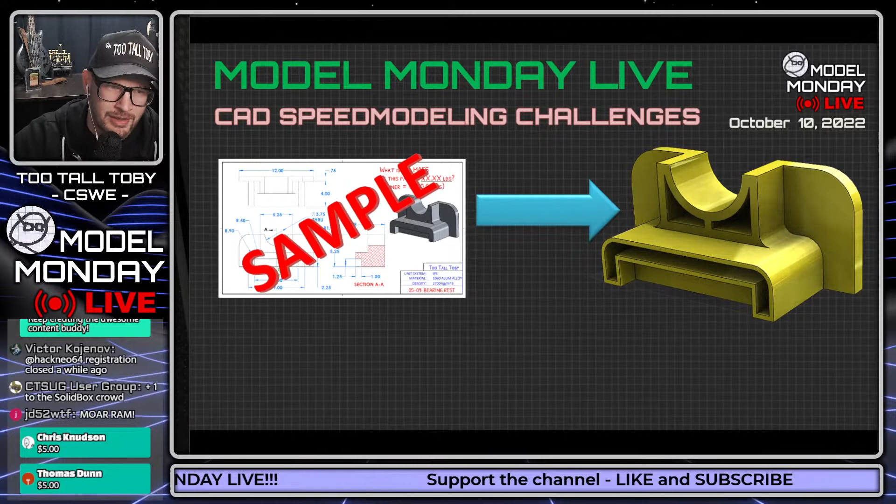So with that, let's get into the live speed modeling challenges today. Here's how this works. I'm going to show you guys a 2D print, and I'm going to challenge you to turn that into a 3D model. You're going to calculate the mass for that 3D model, and you're going to enter that mass into the YouTube chat. You can use any CAD system you want, as long as that CAD system will allow you to input density and output mass.

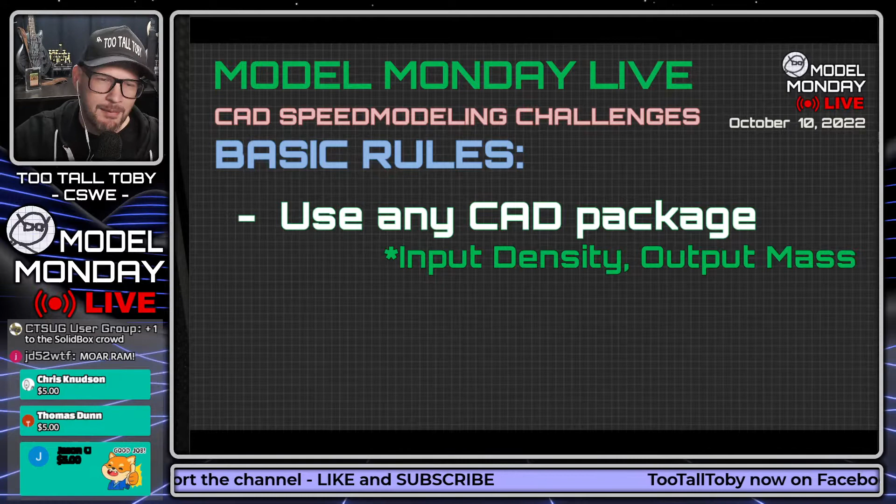So you can use any CAD system you want as long as you can input density and output mass. Let us know in the chat if you're using something other than SolidWorks. Would love to hear from some other non-SolidWorks users, and let us know if you're using SolidWorks as well. Let us know in the chat what CAD system you're using today for this 3D CAD modeling challenge.

What's up, Jed Hightower? Welcome. Make sure that when you answer this question in the chat, you use the specified precision, and the first person who gets the answer correct in the chat will be declared the winner. So I see some people saying SolidWorks. Airwick says he's using OnShape, corrected to OnShape. We allow corrections here. Victor using SolidWorks 2020. Steve, CTSUG, what's up Steve? Using SolidWorks 2021. Anti-Venom, SolidWorks 2020. My favorite build is SolidWorks 2020 SP5. Love it. Ali using SolidWorks 2022, good luck Ali. Thomas Dunn using SolidWorks 2020 as well. Betty Baker 2021. Garrett using 2022 SP4. Coded my own modeling package, only work from the command line in Linux. That is impressive.

JD52, the units that we use for these challenges are always either IPS or MMGS, so inch-pound-seconds, or MMGS, and the materials are always one of these three materials here. You've got density 7,800 kilograms per cubic meter in plain carbon steel, you've got 1060 aluminum, and ABS. These might be different densities depending on which CAD package you're using, so just take a moment and make sure that you have the correct density. This density will also be listed on the title block.

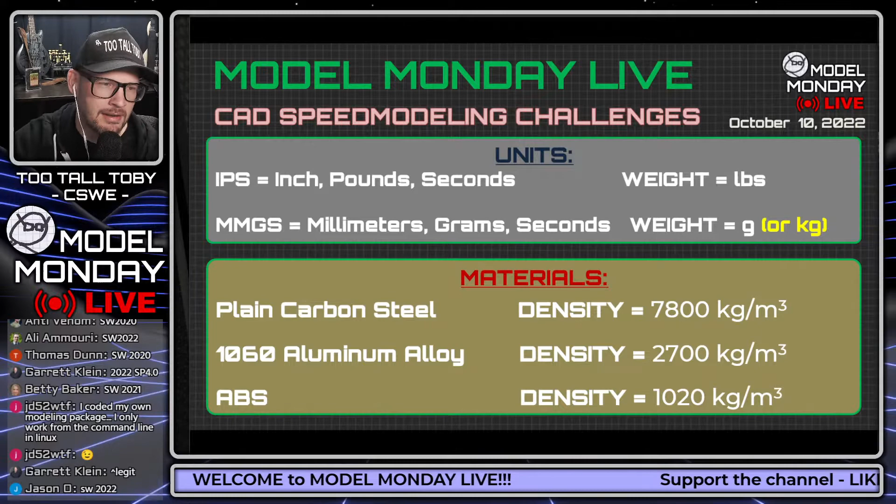The advanced rules are, this is meant to be a fun and good-spirited competition. I will make mistakes from time to time, so I might miss a dimension or a tangent edge on the print. And the Ivan exploit is permitted and sometimes encouraged. Really, it's usually discouraged, actually, because I try to create the models in a way that you can't really leverage the Ivan exploit that much. So I always say it's permitted and sometimes encouraged, but that's kind of a lie. The truth is I actually occasionally discourage it through the modeling methods I use in the challenges. So for whatever that's worth.

All right, let's flip over to full screen here. What's going to happen is in just a moment I'm going to show you guys this 2D print, and I'm going to challenge you to take a screen capture of that print and turn it into a 3D model. As soon as I show the 2D print on the screen, do a screen capture using Windows Snipping Tool, Snagit, Flag Shift S, or MW Snap, whatever you want to use. Just grab a screen capture of what I show on the screen, and then you can attempt to model that. This one, we're going back a ways, to the December tourney in December 2020. So here we go in 3, 2, 1, go.

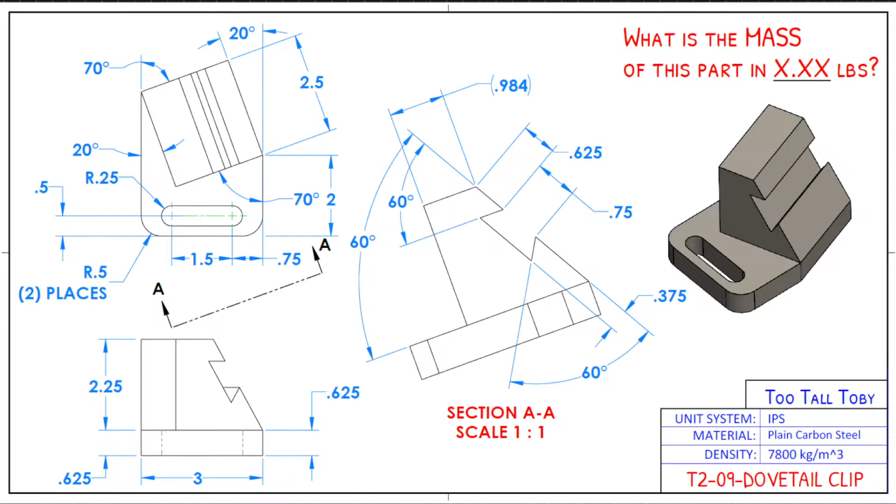And of course, these challenges are essentially a derivative of, or in this case, are a direct example of the tournament, the TooTallToby 3D CAD speed modeling tournament. And we are in the thick of that tournament right now. The tournament started out with 32 people, so we had 32 runners who signed up.

We did see a question earlier in the chat. If I go back up in the chat here, who was that from? It was from HackNeo64. That's awesome, it sounds like an N64 game. HackNeo64 says, how do I register for the CAD tournament? I went to your site and couldn't find out how.

So the short answer is that the registration is full. We had 32 spots open, and then we actually had 15 people sign up on the waiting list. So you're not going to get into it for this year. The best thing you can do is stay tuned in to these Model Monday live competitions, and we'll let you know when the next tournament registration goes live. We're going to do a tournament in 2023 as well. With all the interest we've been able to stir up this year, I think we'll have qualifications for that tournament, probably similar to what we've done in the past, where you can earn points during Model Monday Live. So the best thing to do is stay tuned in to Model Monday Live, stay subscribed to the YouTube channel, and we will definitely announce when the next tournament registration goes live.

Gotta take a sip of my afternoon coffee here.

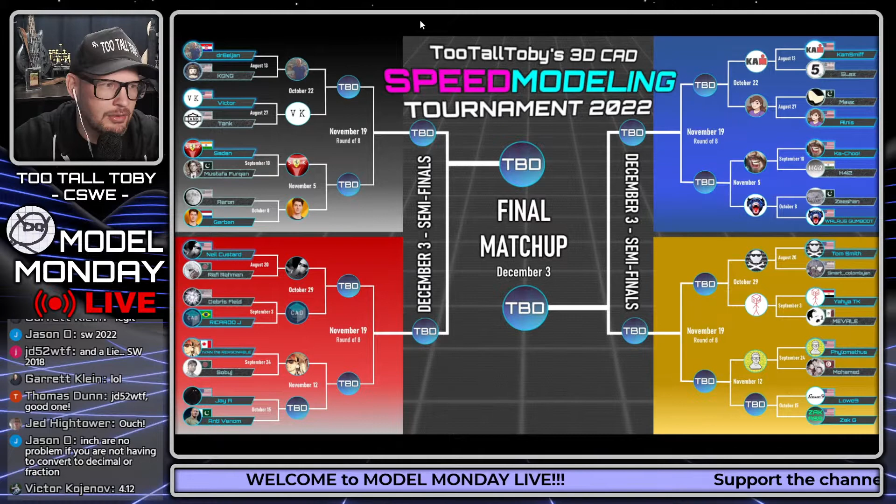So this is what the tournament bracket now looks like, and it's pretty exciting here because we're actually done with the black bracket. We see Dr. Beljan, Victor, Sadan, and Gerben all advanced through their round of 32 and are going to be competing either on October 22nd or November 5th in the round of 16. So the black bracket is done, we made it through the round of 32. Congratulations to everybody who made it through.

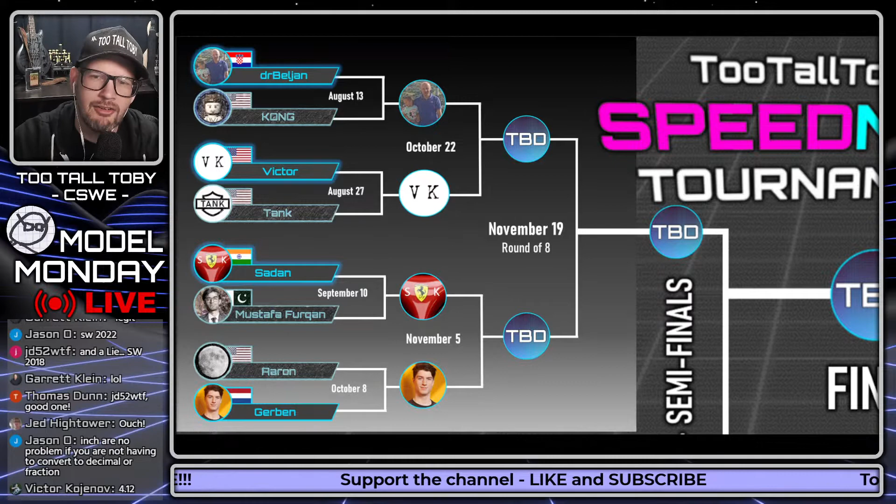I see Victor K is in the chat answering the speed modeling challenge as well, just kind of further exerting his dominance over the field in the world of 3D CAD speed modeling.

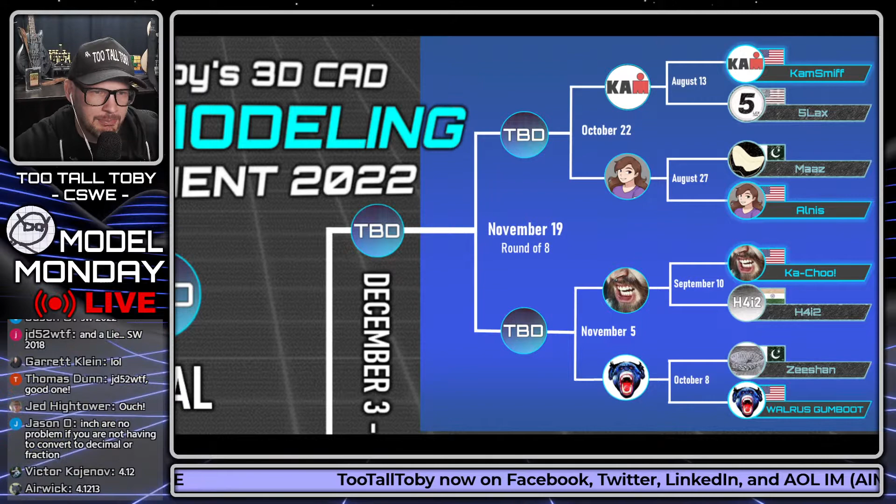We also saw that in the blue bracket, we have finished out the blue bracket as well. So we got Kam advancing, Alnis advancing, Ka-Chool advancing, and Walrus Gumboot, who just ran over the weekend on October 8th. So that's our blue bracket, completed as well. That's what it's going to look like for the round of 16. I'm excited that we were able to get through that blue bracket this weekend. We've now established basically our top 16 for the blue bracket and for the black bracket.

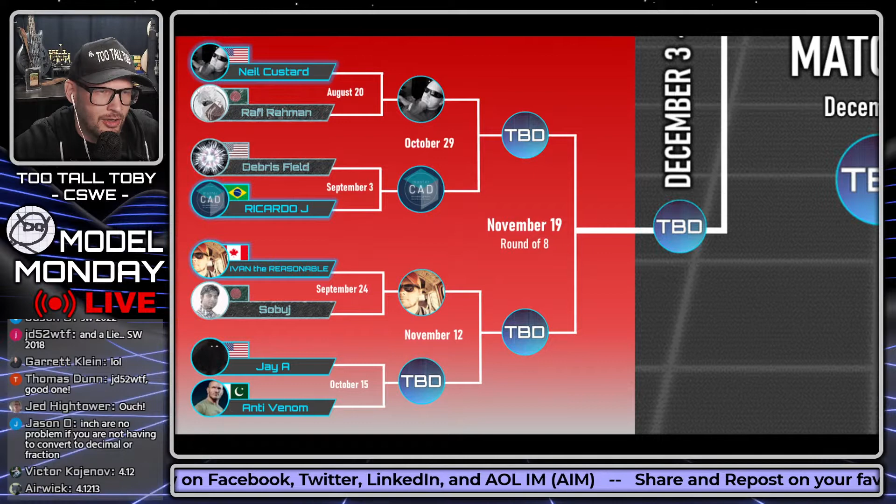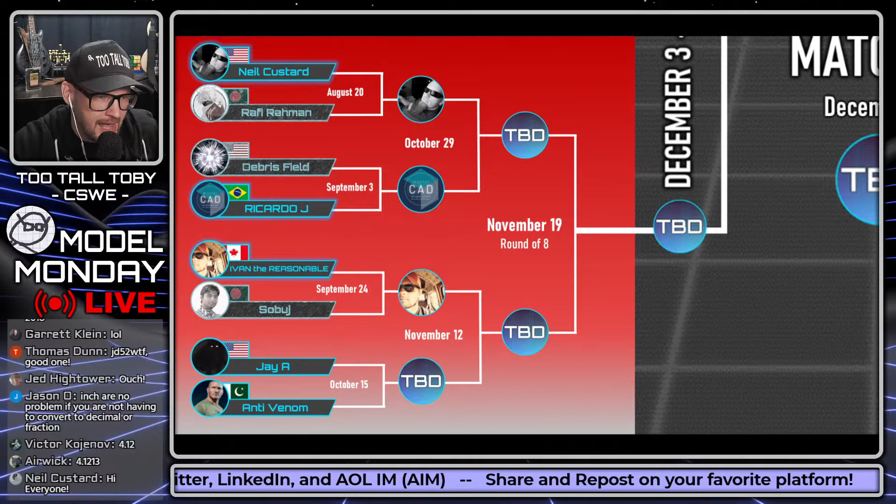Sorry, I didn't mean to call that the round of 8, it's round of 16. Here we see the red bracket. Neil Custard was one of our first runners, and he's also one of the earliest CAD SolidWorks users out there. He started back in the early days of SolidWorks and ran on August 20th and passed through. So he's going to go up against Ricardo J on October 29th. And then we also have Ivan on November 12th going up against either Jay A or Anti-Venom. We're going to find out this weekend whom amongst that group is going to pass through. If it is Anti-Venom, then what we're going to see is 4 different countries in that red bracket going into the round of 16. I think that's pretty cool.

And then finally, we've got over on the mustard-colored bracket, Tom Smith advancing. We've got Yahya TK advancing. We got Phylomathus advancing. And this weekend, we're going to see Lowe9 go up against Zak G, and we will find out who is able to advance through that one.

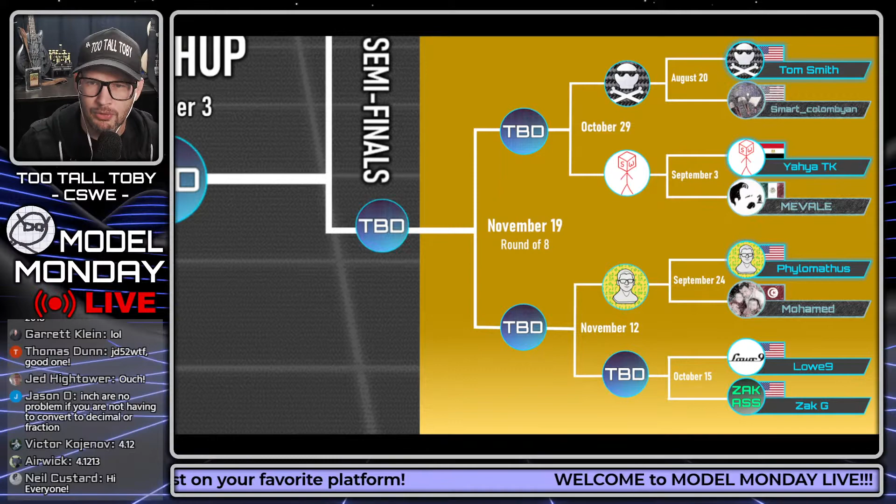Oh, we see Neil here in the chat as well. Neil, what's up? Welcome, glad to see that you're tuning in today. Literally just talking about you, and here he is in the chat.

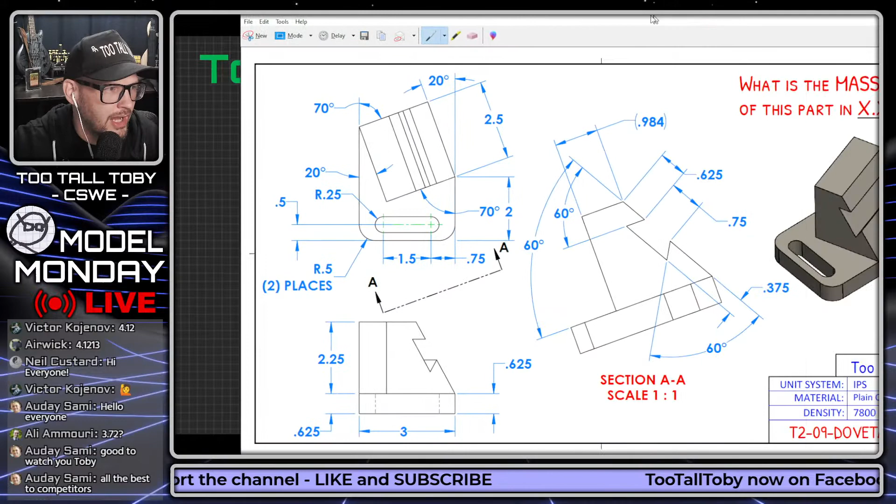All right, so for those of you who are trying to solve this model, I'm going to go through and solve it here, do a little bit of a live solve. I know that I get a lot of requests from people to do these live solves to help people understand what they may be missing. And so in the case of a model like this, we always want to ask ourselves, what is going to be the starting plane? What is going to be the starting profile? And just kind of generally speaking, you want to kind of unbuild the model in your brain.

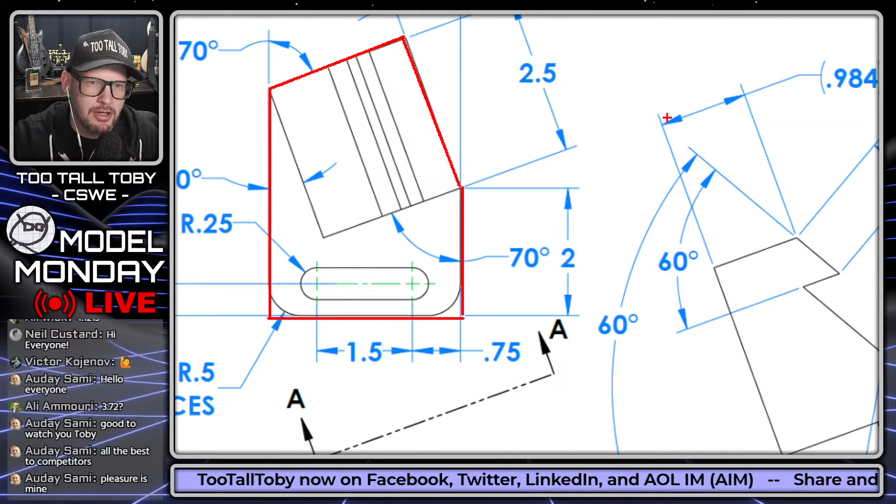So I think for me, the starting profile would look something like this. I would come down with a line this way, a line that comes across this way, a line that comes up to this point, and then I would create a line like this, and then another line like this. That's probably going to be my starting profile. So starting plane would be the top plane, starting profile would be to create some kind of a shape like that. Hopefully I have all the dimensions I need. I don't see an overall width here. I know I could go 0.75 plus 1.5 plus another 0.75 to get to 3. But okay, actually 3 is shown down here in this bottom view.

And so once I have that shape created, then I would probably attempt to tackle this second shape. And in production, what I would do almost certainly is I would create the second shape like this.

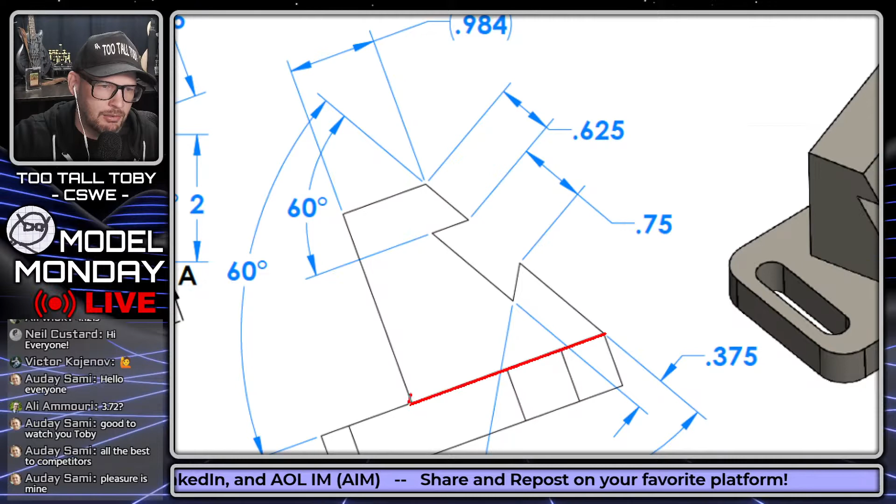And then I would create a third shape that represents this keyway. You keep your features separated because it makes it a lot easier to edit those features later, and a lot easier to find them in the tree. So that's kind of how I think I would approach this thing.

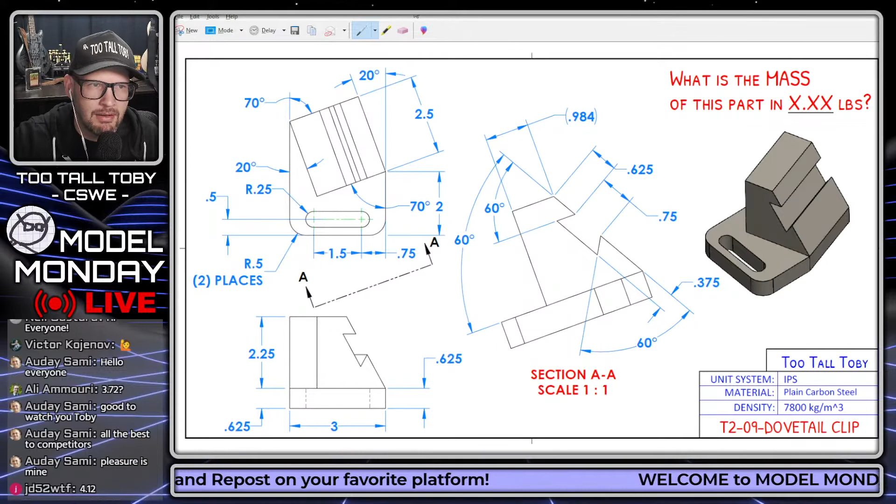Let me jump over into SolidWorks and we will see if that approach yields the correct mass. So let's go, jump into SolidWorks here.

2020 SP5, my favorite build of SolidWorks. It's a close one, I like 2015 SP5 too. So I'm kind of torn a little bit - you got your old girlfriend and your new girlfriend, got to figure out which one you like the most. Or just keep them both, that's good to do too.

All right, here we go. Top plane, begin a sketch. Oh sorry, new part - choose the correct template. In this case I've got a template set up for IPS plain carbon steel, so I'm going to use that if I can find it. Here we go.

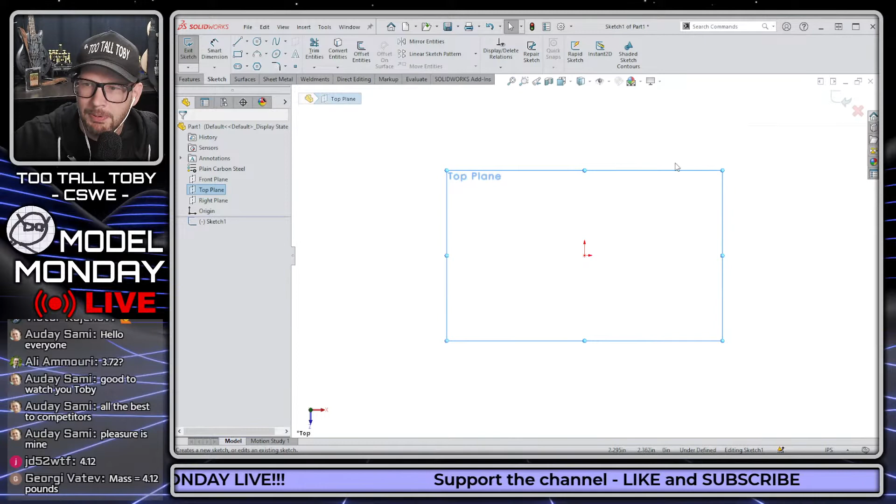Top plane, begin a sketch, orient the view. Got to decide on the location for the origin. This part doesn't really have any symmetry, so it's kind of arbitrary. So I'll just drop the origin down here in this corner, move my mouse over, let go of my mouse.

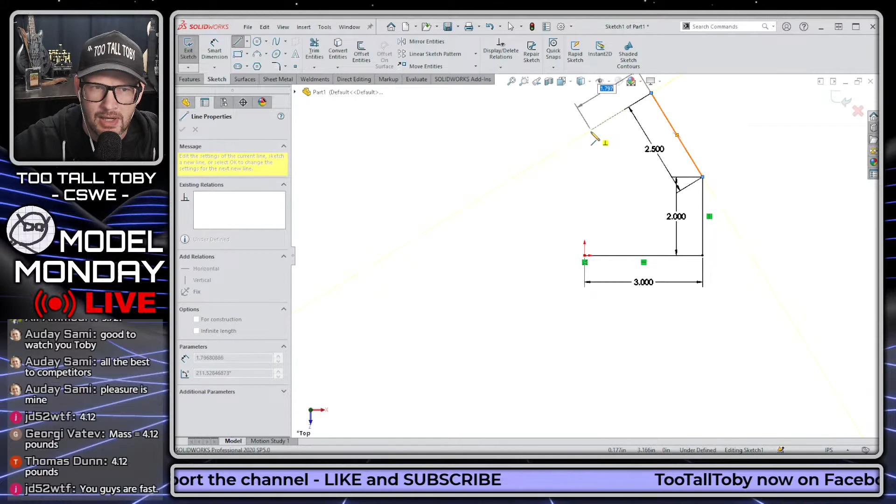So I'm letting go of my mouse hand there, and then I'm going to type in the width of 3 inches, move my mouse up, let go, type in 2 inches, move my mouse up at an angle, let go, 2.5. Move my mouse down perpendicular, so it's exactly above the origin, and then finish up going down here. So you see I got that perpendicular relationship on that first pass, and so now the only thing left to do is put in the angle of 20, and I think that should fully define that sketch.

S key, boss extrude, 0.625 for the depth of that extrusion. That gives me that height, and now I'm ready to create that second shape.

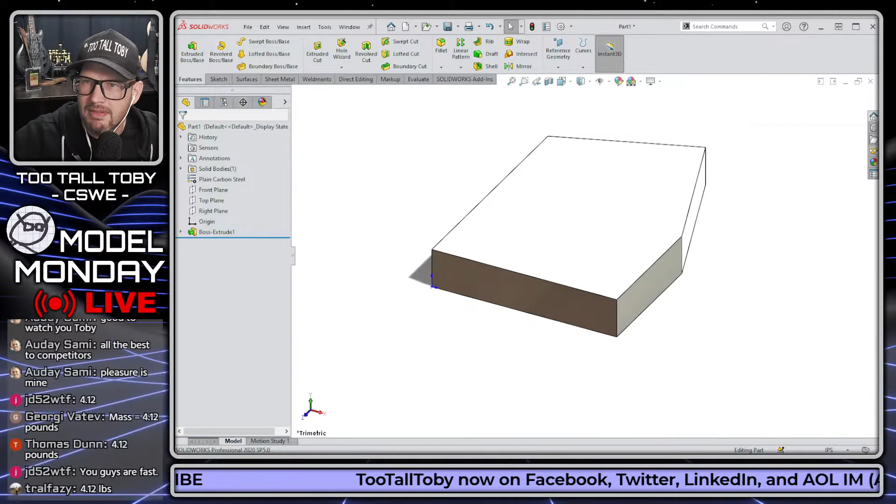And in order to create that second shape, I'm gonna need to create a plane. Oh no, I don't need to create a plane, right? I can just sketch it on that tail end. So that's what I'll do. I mean, it's a little awkward just because the print is backward.

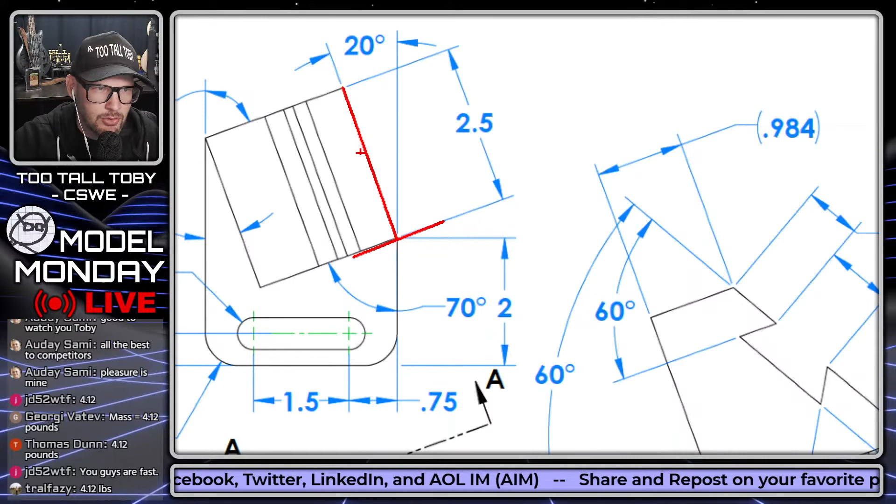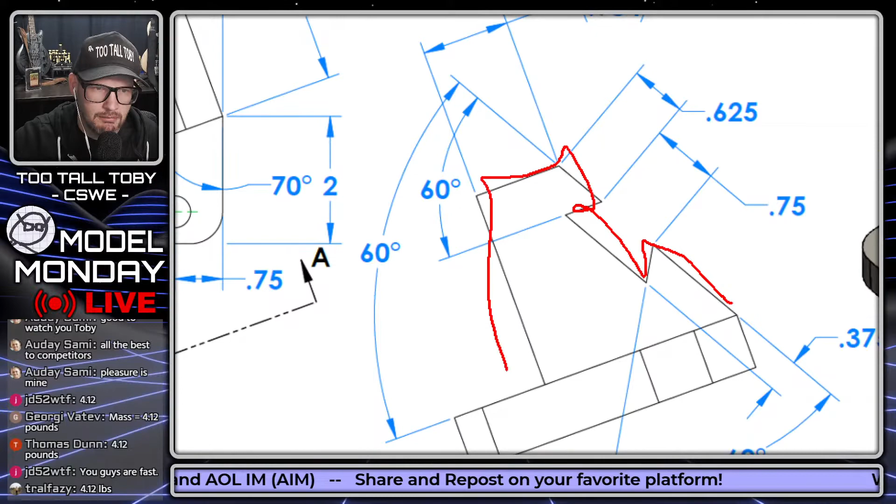So if you wanted to, and I do want to, what you could do is create a plane here at this end point by utilizing reference geometry, plane normal to an edge at an endpoint. It's a very easy workflow to generate a plane there, and because it's going to give me a more intuitive view, considering this view is coming in from the end, it might be worth it. It's so easy to do, it's probably worth it - worth it for me, that's for sure.

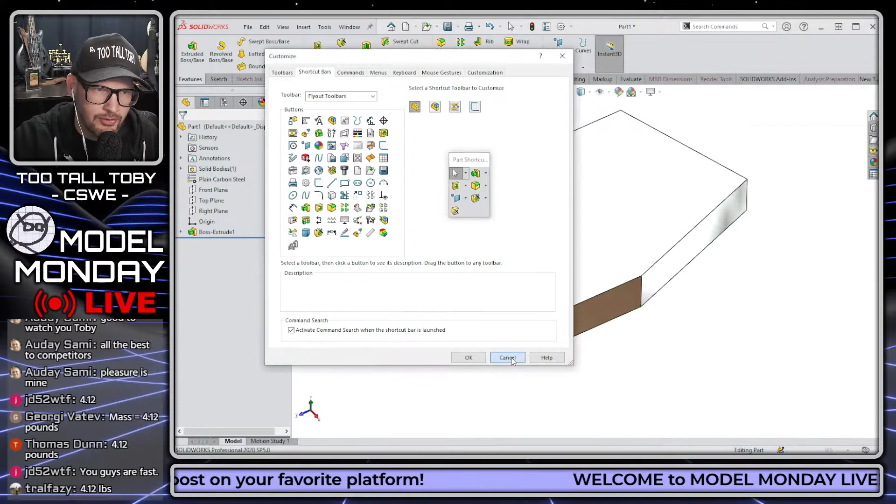So what I'll do is S key, reference geometry, plane. By the way, when I'm using this S key functionality, there's not much I've customized, but if you want to see a video on how I customize the S key, you can find that on the TooTallToby YouTube channel - just search for S key and you'll find it. But this one's out of the box. S key, reference geometry plane, then I pick an edge, then I pick an endpoint of that edge, and then I right mouse button to finish, and that gives me a plane perpendicular to the edge at the endpoint.

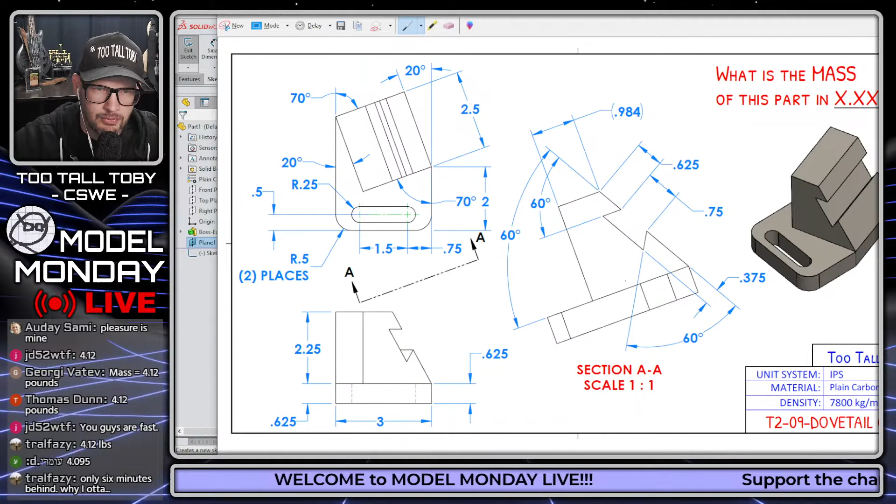So now I can select that plane, begin a sketch, orient my view, and then I'll press Control-8 again to get oriented the same way the print is showing. So it just makes it a little easier for me to work off the print there in that section view AA - it's really an auxiliary view, not a section view.

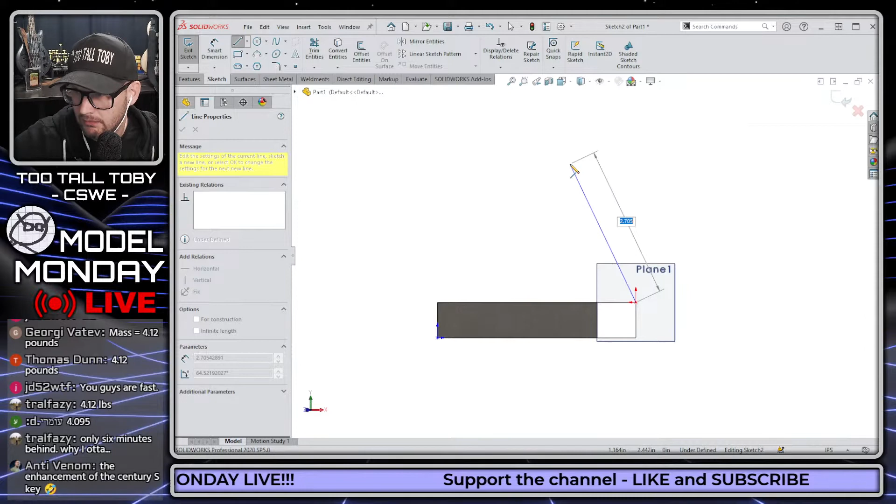Begin a line, and this line is going to be coming up at an angle of 60, so I'll just kind of eyeball it up there. And that line, how do we get that height? That's the question, huh? Well, this is horizontal essentially, so I can just get the height from there.

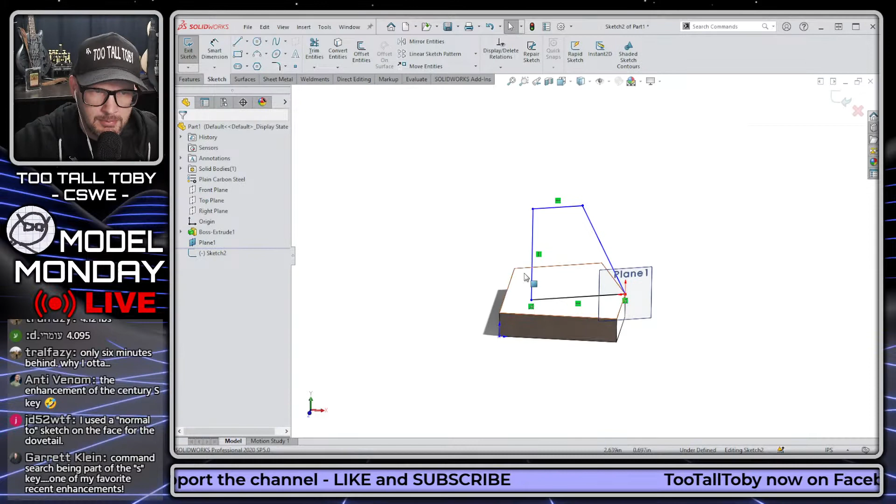And I guess because I grabbed this from that location, this is going to project straight in this direction. So I should be able to just make a coincident relationship between that point and this point, or even if I wanted to illustrate it better, this line and this point.

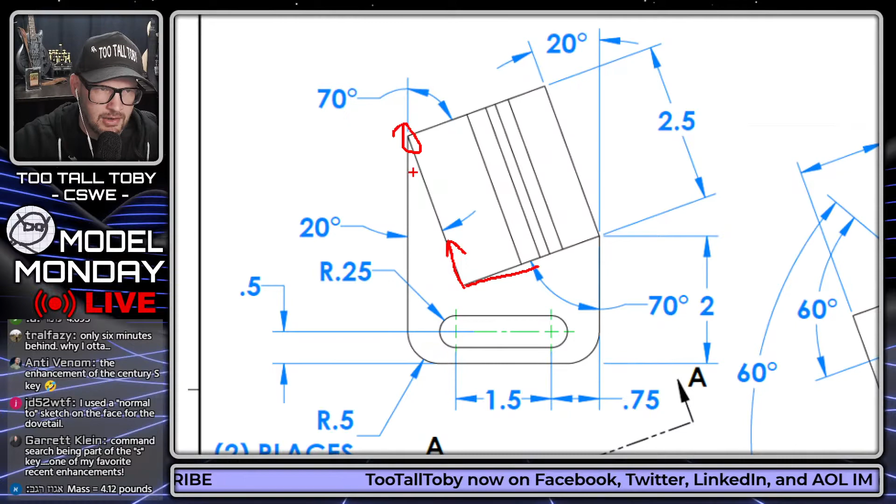So if I make those coincident, then it locks in that horizontal distance, because it needs to intersect this edge I'm creating here, but when we go in this direction, it needs to intersect exactly here at that point. So I was able to establish that by taking this line, or the end point, and making it coincident to that point. That seems like it's solid.

And now I can go smart dimension from here to here, and that gives me that height, 2.5, and then I can finish that off with that angle dimension of 60.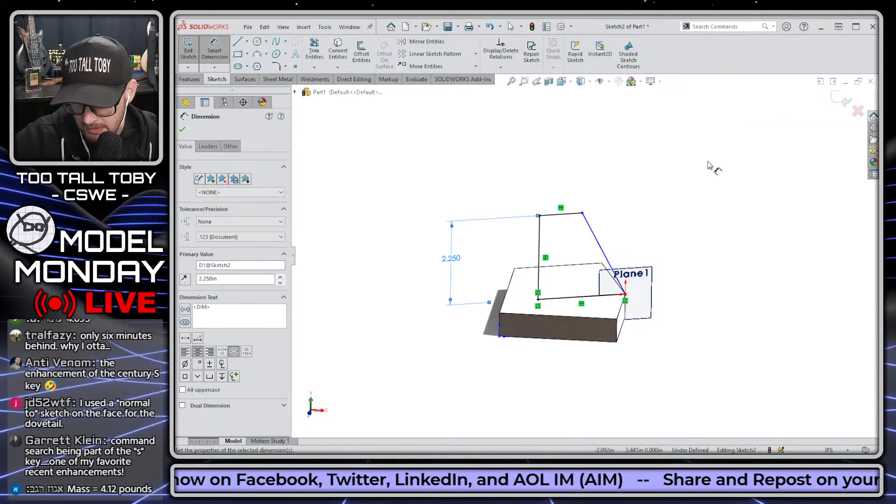So it looks like this line and this line here, 60, and then S key extrude, and you can see currently the extrude is set to blind, but one of my favorite time-saving tricks is I can double-click on this surface, and then right mouse button, and that finishes that extrusion, leaving me with that shape.

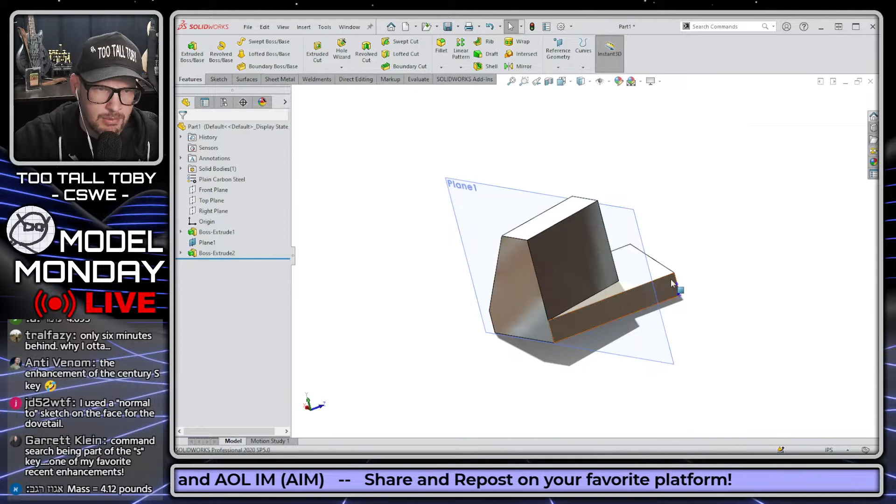So again, just to see that again, you go extrude, currently set to blind, don't click anything, just double click here and then right click. That finishes that extrusion up to that surface.

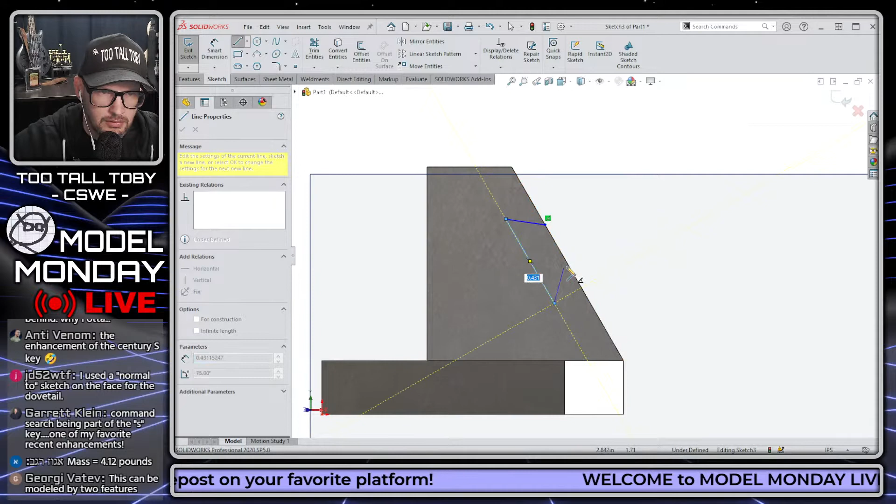So now pick a face, begin to sketch, orient the view, and we just need to create that keyway shape, which is something like this. Not midpoint - see, I picked up midpoint there, but you don't want to fall into that trap. That'll end up costing you some time trying to figure out what the heck just happened.

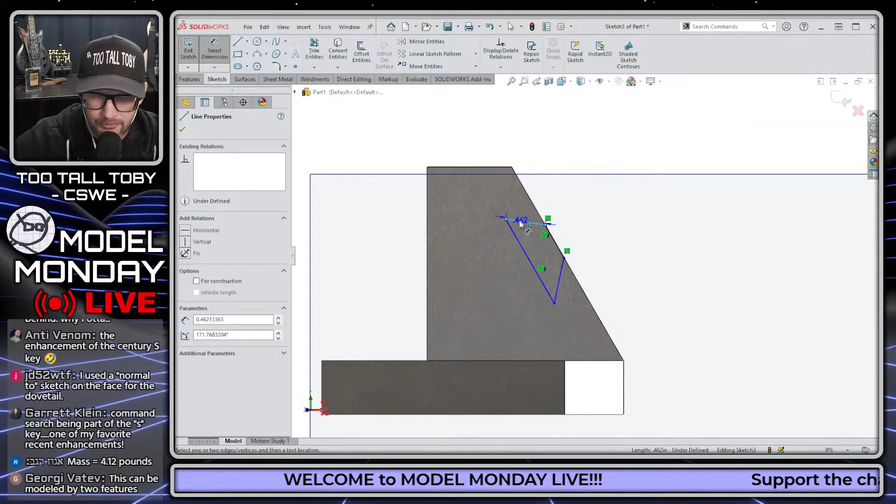And let's see here, these are also at 60. And that is off of - boy, that's a funky angle, huh? I mean, it's basically just parallel here, right? And then this guy here is 60 off of here. Boy, that's a funky angle, the way it's made. Whoever made this drawing is crazy.

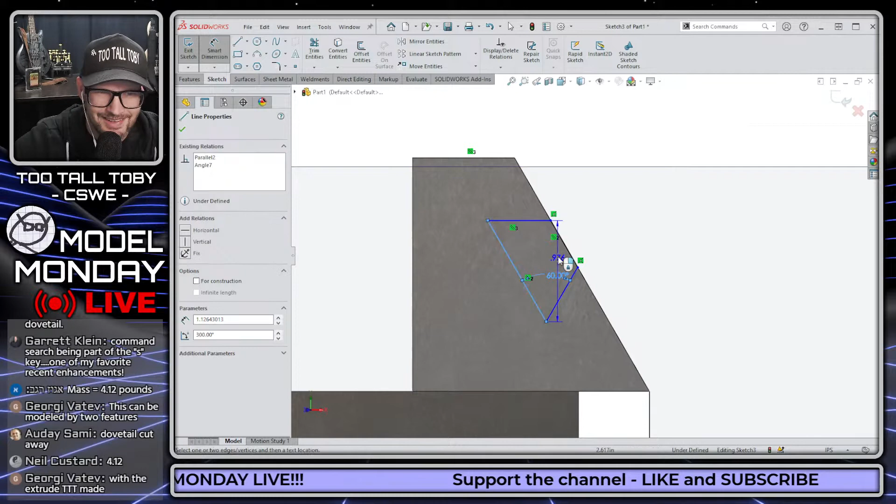So then you can see we can go here, 0.375 for the depth of that, and then a distance dimension from this point to this point of 0.625. And then finally a distance dimension on this line of 0.75.

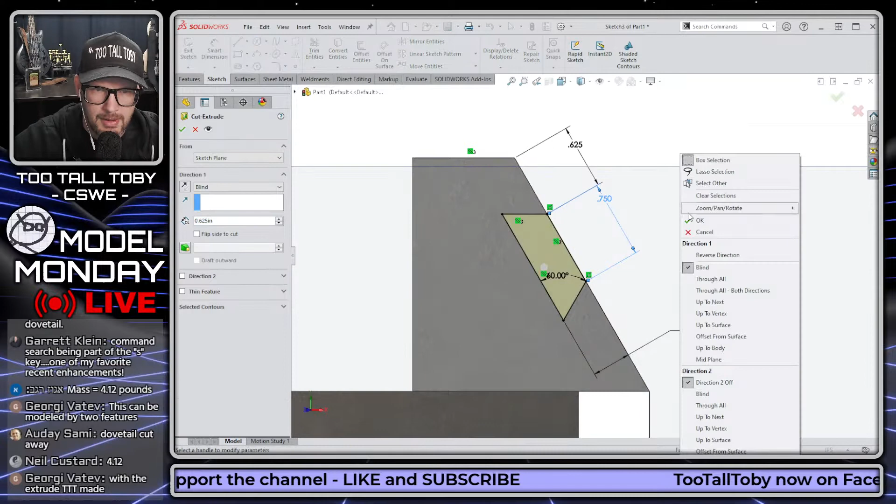S key, extrude cut, right mouse button through all, right mouse button again. That gives us that little nice keyway there.

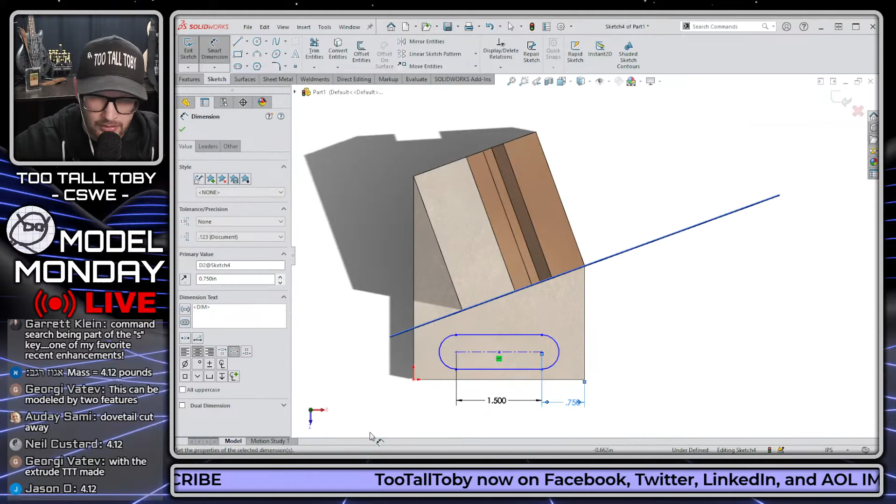And then select face, begin to sketch, orient the view, S key, slot. And we can create a slot that comes across here like so. And that's going to have a distance of center to center, 1.5, and a distance from this edge of 0.75, a distance to here of 0.5, and a radius of 0.25.

And then S key, extrude cut, right mouse button through all, right mouse button, finish that up. And we can hide this plane, so click on the plane and hide it. We can S key fillet, and that's going to be at a radius of 0.5.

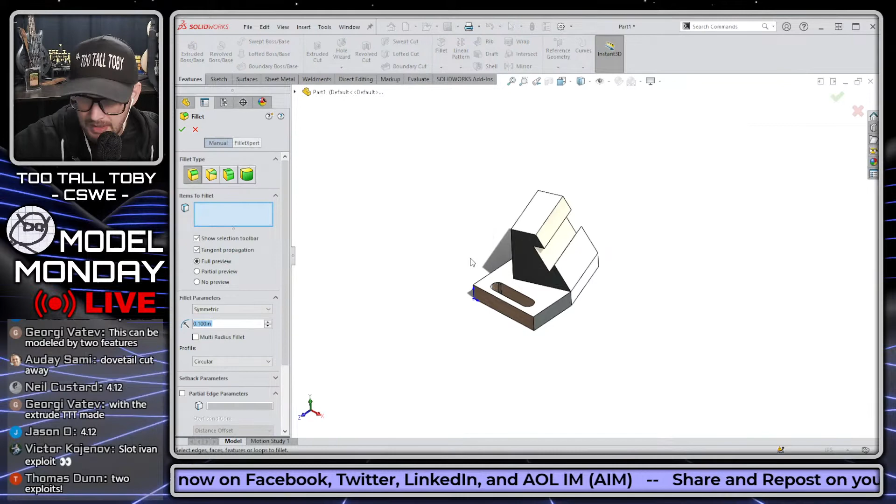And that'll be this edge, and not really a quick way to get both of them, huh? And this edge - just pick them both. Right mouse button to finish that.

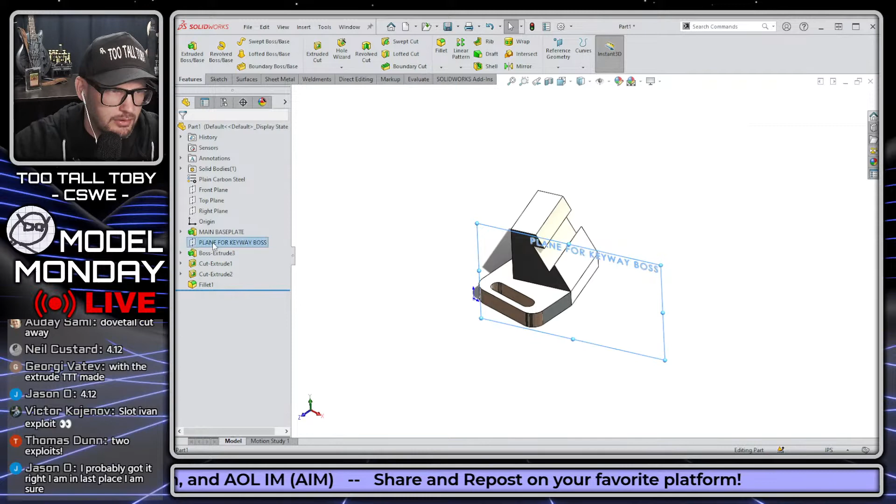And then maybe a little bit of renaming: main base plate, and this will be plane for keyway boss, and then this will be keyway boss, and then this will be keyway boss cut, and this will be slot cut, and this will be end fillets.

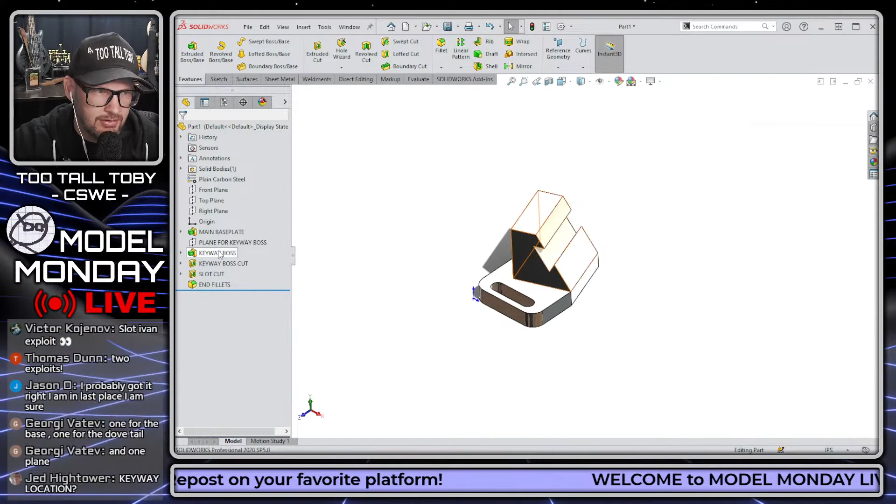And the reason we do that is because if you have a very complicated feature tree and you want to find everything related to the keyway boss, you come up here to the little filter up top, type in keyway, and now you see the tree only shows items that have the word keyway in them. It's just a nice, quick way to get through that feature tree when you've got like 50 million features in the tree.

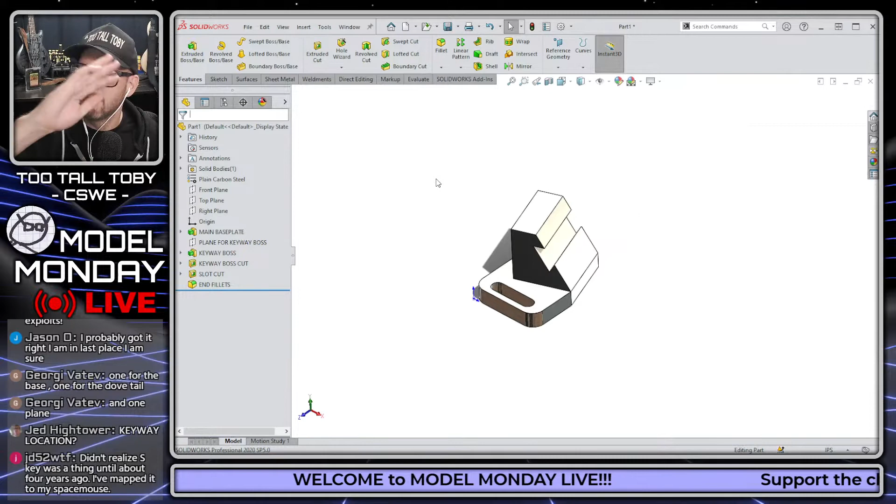Okay, and so now we can go to evaluate mass properties, and our mass comes out to 4.12 pounds. What is the mass of this part? I'm going to say 4.12 pounds. Copy and paste that in there, and hopefully I got it correct. I don't know, let's find out.

Let's see here, got some stuff going on in the chat. What do we got? JDF coming in saying, you guys are fast. Yeah, I agree.

Only 6 minutes behind, says tralfazy. Been seeing a lot of comments from you too in the videos, so thank you for that.

Use normal to sketch on the face for the dovetail. Yep, that's good. Command search being part of the S key is one of my favorite recent enhancements. Yeah, I don't use that one too much, but I do know what you're talking about, having it right there. I guess obviously I don't use it too much because I'm still in 2020.

It's going to be modeled by just 2 features.

You could just model the whole thing in 2 features. I try to, generally speaking, especially for production, avoid having too much in one sketch or one feature, just for the reasons I showed a moment ago.

When you rename the features in the tree one by one, it makes it so easy when you're doing a design review. The customer says, hey, can you make that slot a little wider, or relocate it, or get rid of that slot, we don't need it anymore. It just makes it so easy to find those features in the tree and make those changes.

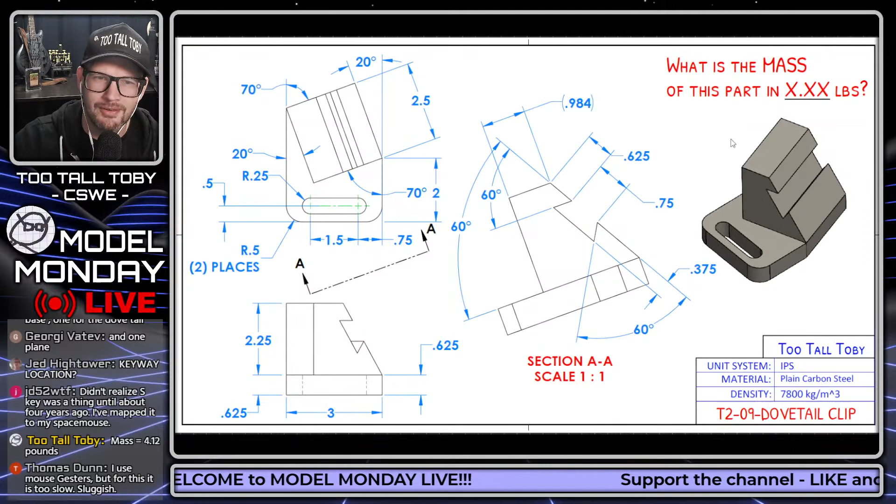All right, so what is the answer? What is the correct answer? Let's talk about that in just a second.

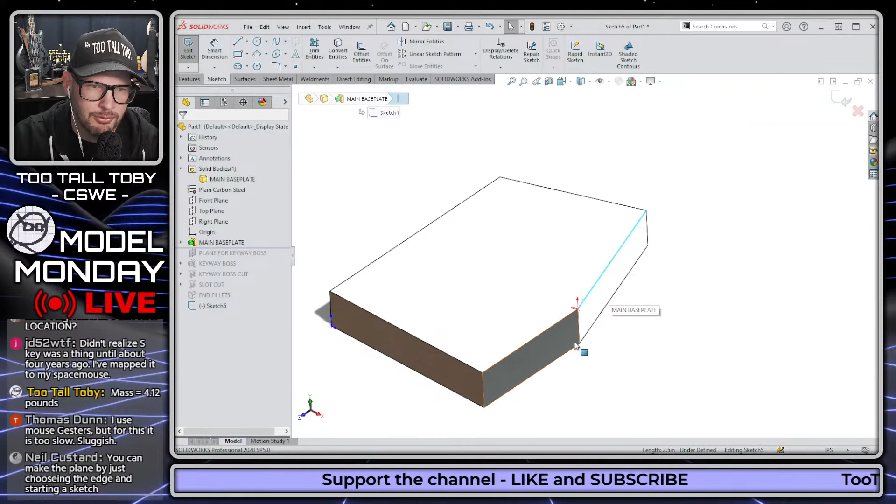Oh, Neil Custard throwing out the pro move - yeah that's a good one, I forgot about that. So instead of making the plane here like so, what we could do is just pick this edge and then choose to begin a new sketch. So choose the sketch icon up here, and SolidWorks will actually create the plane there for you. You notice it doesn't show up in the tree yet, but it is there - it's showing you the plane, the name plane 2. And then if I create the geometry and exit the sketch, both the plane and the sketch are there waiting for me. So good call, Neil, that's definitely a pro move.

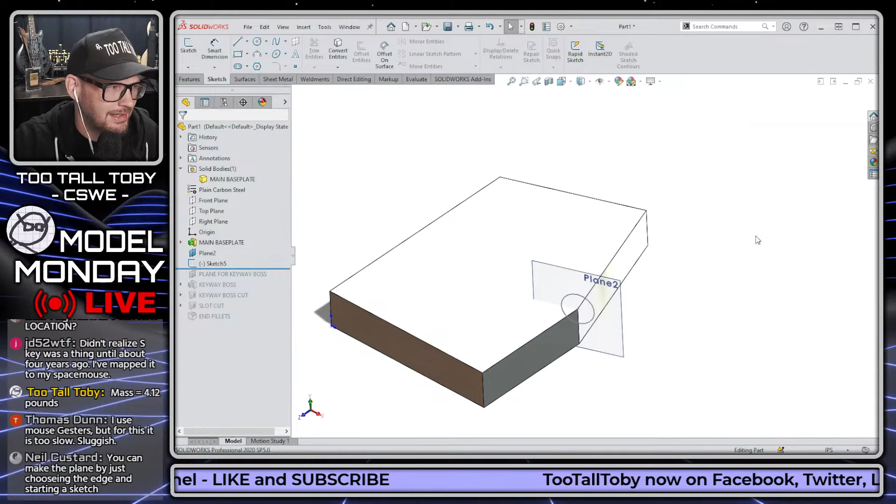Mind blown, says Victor. Mind blown. I agree.

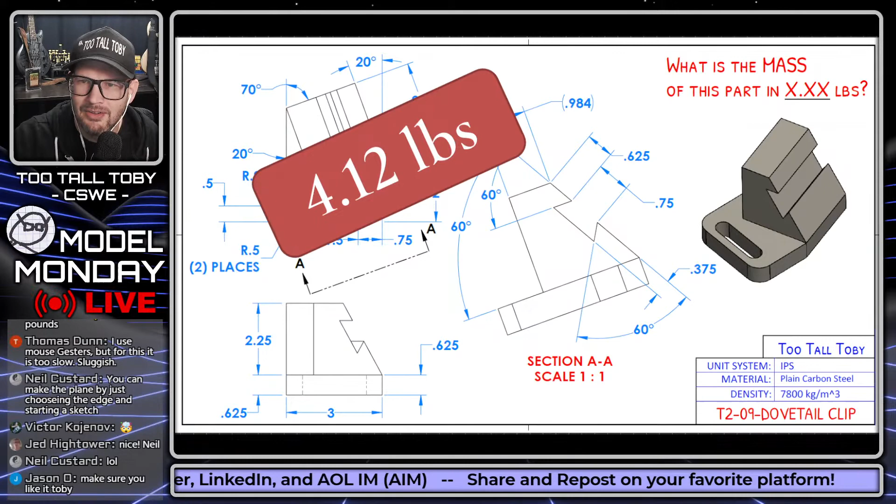So we can see here, if we go back through our chat, who got it right first? I think it was Victor. We see it is Victor - Victor K, good job, good game Victor.

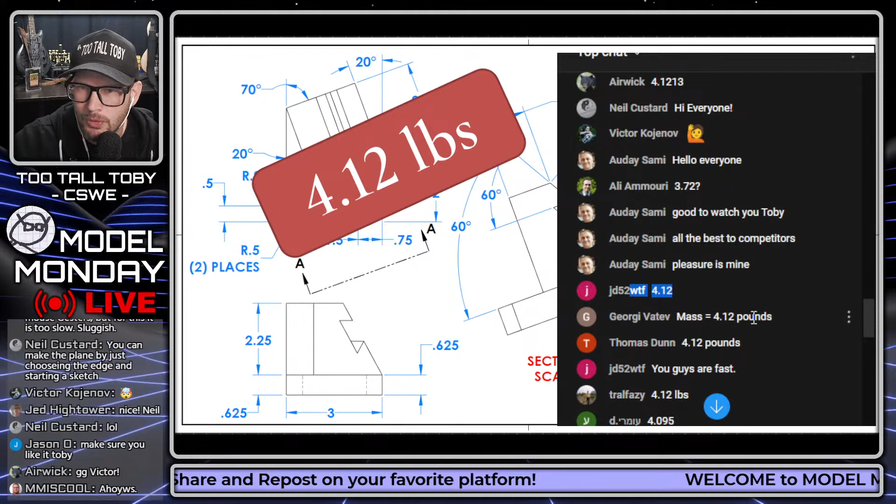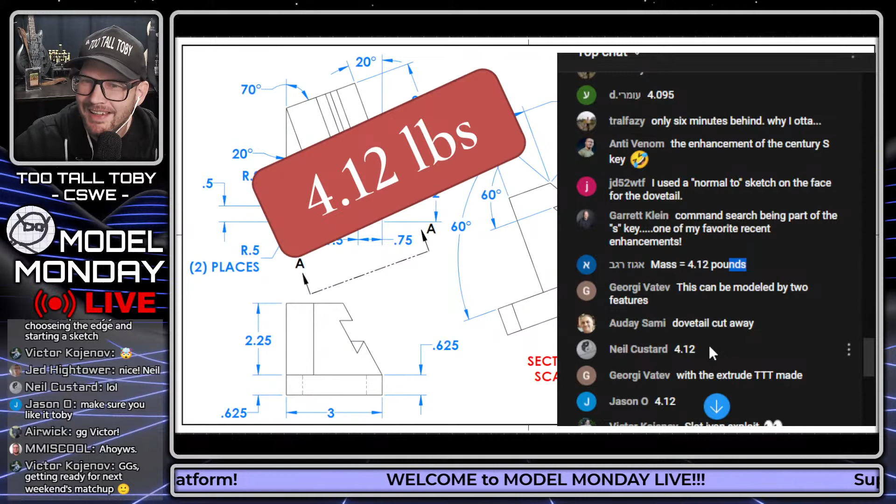Airwick coming in with 4.1213 as well. Ali coming in with 3.72, question mark - not quite, but good job getting an answer in there. JD52 coming in 4.12, correct. Georgie 4.12, yes. Thomas Dunn 4.12, yes. 4.12 from tralfazy. We got Omri coming in 4.095, so close, so close. We got this user coming in with 4.12 as well - I'm sorry, I don't know how to say your name. We got Neil coming in with 4.12. We got Jason O rocking it with 2 monitors coming in with 4.12, nicely done. We got TooTallToby coming in with 4.12 as well.

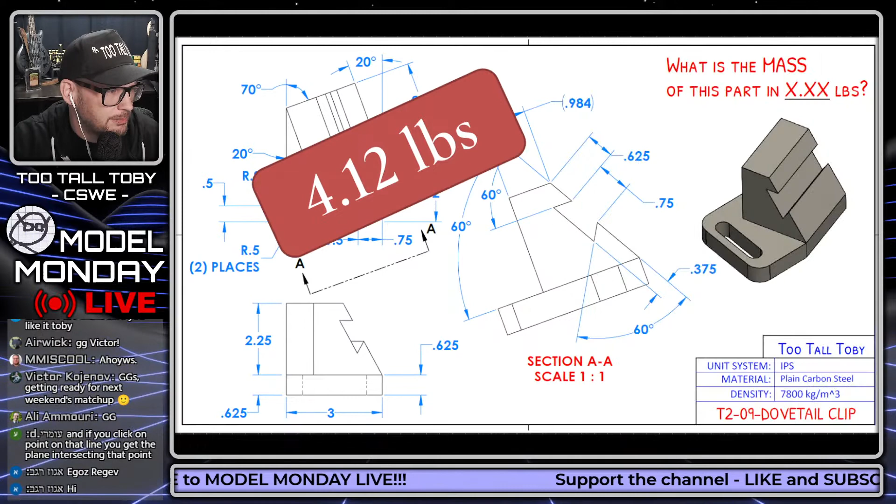Let's go full screen. Challenge number 2 is once again going to be borrowed from the tournament in 2020. This one's called Draw Bar Pivot, and it's a little bit more complicated. So you guys got just under 30 minutes, probably about 25 minutes to finish this. Good luck. Thomas Dunn says GG Toby - thank you very much, Thomas, appreciate it. GG to everyone who got that answer. Here we go, in 3, 2, 1, go. What is the mass of this part in XXXX grams with a plus or minus of 5 grams?

Wow, I was very generous back in the old days. That's a huge tolerance. So what is the mass of this part? You can take a look at the print. You can see all red fillets are radius 3, which is a total of 12 edges. Be sure you take note of that.

I don't think that radius 3 is called out in the black and white print. It's only called out in the color views, the solid colored views. And this is in MMGS, plain carbon steel, with a density of 7,800 kilograms per cubic meter. So good luck to everyone.

Egoz, what's up? What's up? Thanks for joining us, and welcome to the party.

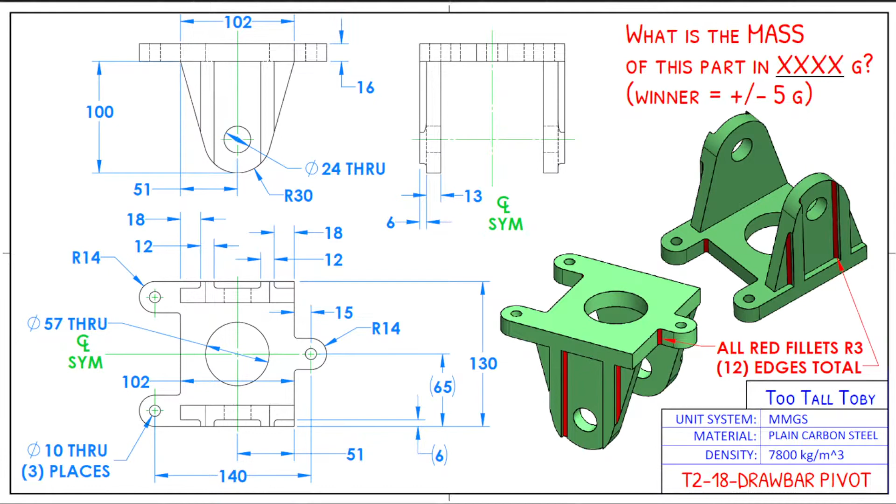Alright, let's talk a little bit about Texas. A little chat here with the super chat. God, it's weird to say a few weeks ago. I almost said a few months ago. It's so weird how time is going this year.

A few weeks ago, we embarked on the SolidWorks Texas Users Group Tour, the Texas Tour. I was partnered with the crew from SolidBox. I got to meet some of them in person for the first time, and it was pretty darn epic.

So the goal of this tour, really the reason why we did this, was because people have not been getting together in person. It's been quite a while for some of these user groups, and I think it's important. This is something that obviously is very close to my heart. The idea of the community, the idea of welcoming everyone, the idea of getting people together in person. The less time we spend together, the more I think we forget about our humanity, and I think that is not a path that we should embark upon lightly.

So I wanted to get people together right from the start. I didn't want to take a break at all, but whatever it is, the world is the way the world is. But the sooner the better, as far as I was concerned, to get people back together in person.

And so we decided to go into Texas and try to stir up some excitement about the user groups using a tips and tricks presentation and a GD&T presentation. So that was kind of the spirit of this tour, was just to hopefully kickstart things a little bit, get the user groups back into action.

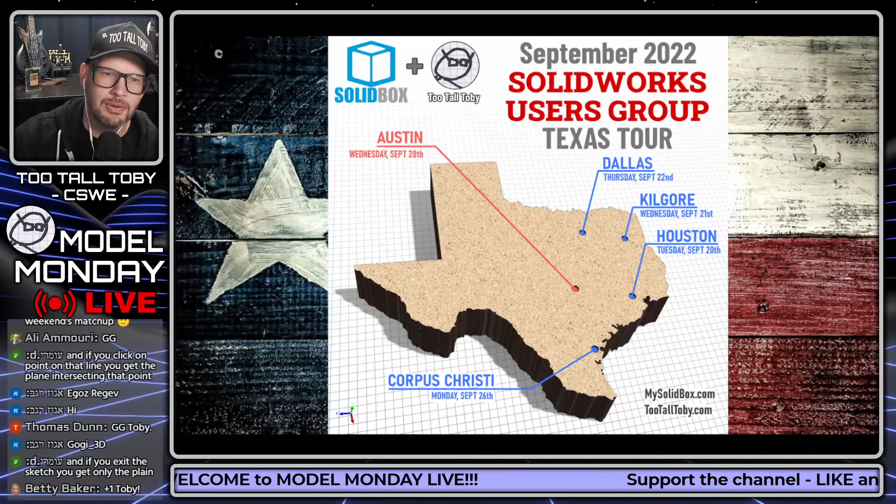So the user group tour started on September 20th in Houston, and it went over the next 2 weeks, ending on Wednesday, September 28th in Austin. And it was hosted by the independent user group leaders. Most of them are hosting on meetup.com.

And after that tips and tricks, talking about sketching, multi-body, importing, and lots of other cool stuff to help save you time in SolidWorks, we moved on to Kilgore, Texas.

And this is where I was able to meet up with the crew from SolidBox. This is Chris Smith from SolidBox here, who gave an epic presentation on geometric dimensioning and tolerancing. And I learned a lot from this presentation. I learned a lot about what GD&T is, the different symbols that they use, what the different symbols mean, and why, and how this compares to traditional tolerancing. So a great opportunity to learn from the crew at SolidBox.

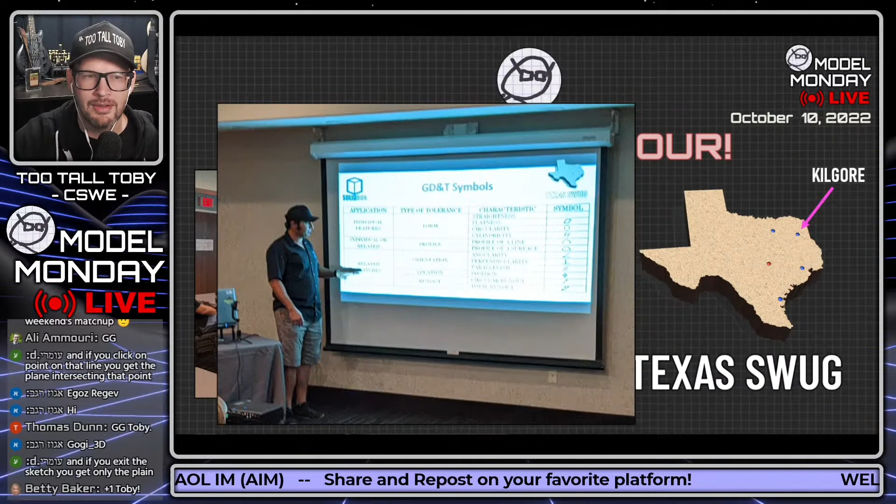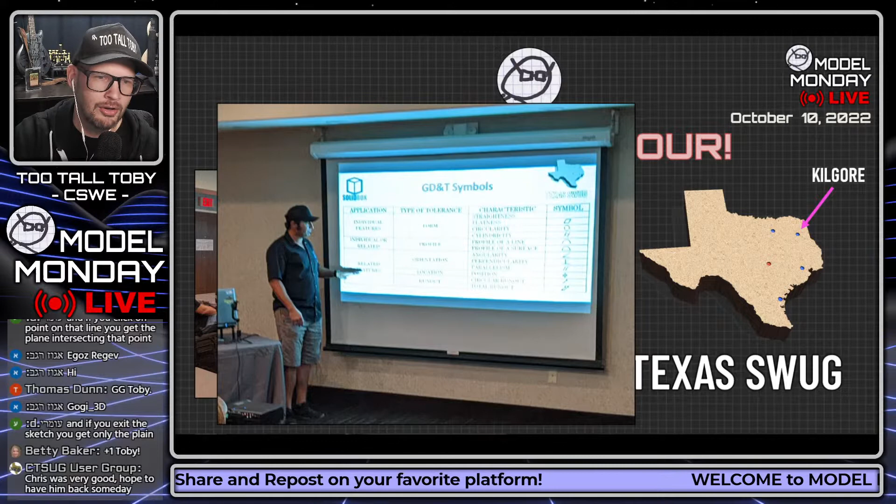Towards the end of the presentation, he talked about how the GD&T protocol evolves over time, and in the current protocol, two of the symbols have been removed. So he got a question at the end when he asked if anybody had questions, and they grilled him on the symbols that were removed. I thought it was funny that they got into such a nuanced conversation about why these symbols were removed. So that was Chris's presentation.

Hopefully this will kick things off, and we'll see more user groups from the Kilgore area, from the East Texas SolidWorks Users Group. A lot of tips and tricks here on how to save time.

All right, on to Granbury. So we were staying a little bit outside of Dallas on this tour, and we were able to go to a local restaurant in Granbury.

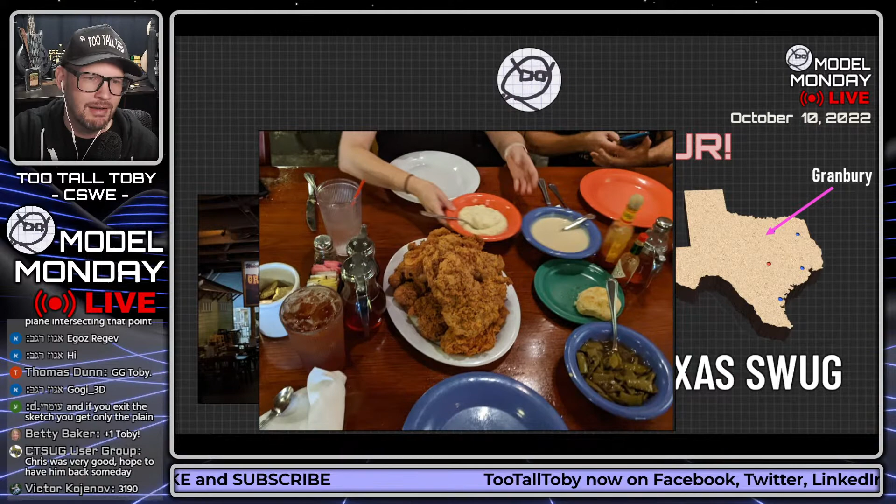What I thought was so cool about this restaurant was that they didn't really have a menu. The waitress just came out and said, these are the things that we offer. We got chicken fried steak, chicken fried chicken, regular fried chicken, some type of a fish option, and then there was a fifth option I don't even remember because I knew what I wanted - the chicken fried steak. Then when the meal came out, it all came out on one plate with sides that everybody got to share, and it was epic. It was like I'd never been to a place like this.

I love it, I love not having to think too much. Usually when I go into a restaurant, I don't look at the menu, I just think about what I want to eat and then I order that, and this made it even easier. So this is my kind of restaurant for sure in Granbury. Shout out to Granbury, Texas.

Then we went to the Dallas Users Group with Rick McDonald, who hosted an awesome users group at the Dallas Makerspace. It was a pretty epic users group as well. It was cool to be in the makerspace and see all the different rooms - they have a very large makerspace with a lot of opportunities to develop your skills and work on your trade. It was very cool.

Chris Smith once again presented on GD&T, sharing some of the differences between traditional tolerancing and geometric tolerancing. At the end, during the questions section, he was once again grilled about why these two symbols were removed from GD&T. I thought it was really funny how he had to answer that again. Shout out to Chris Smith, who had to answer that same question again - and it's not a simple answer. It was quite a grilling experience for him.

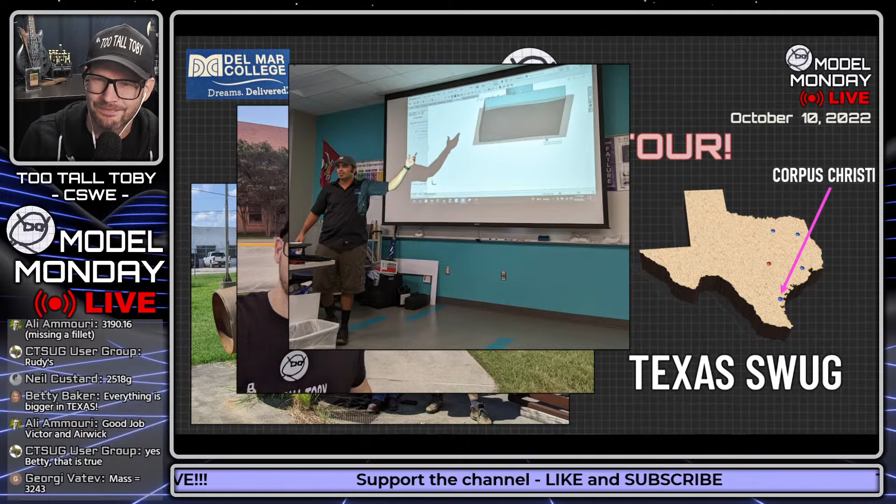Everything is bigger in Texas. Yes, I agree, Betty. Completely agree.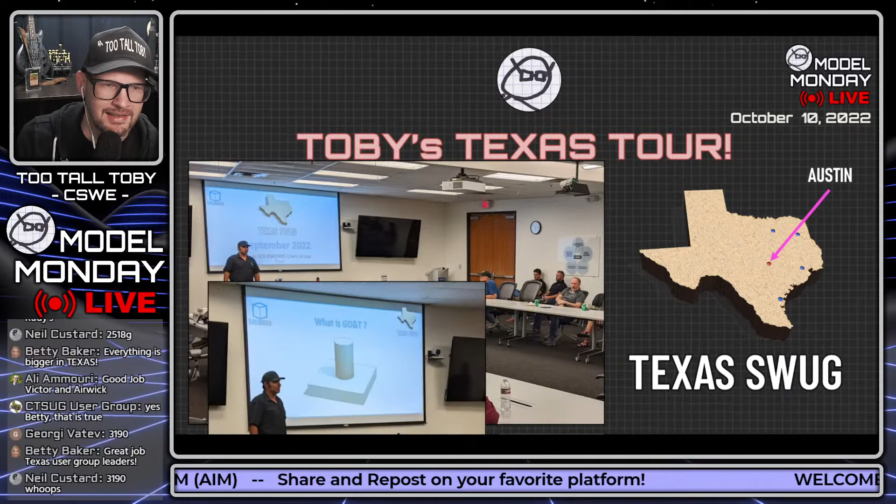And here's Chris Smith doing a presentation again on GD&T, sharing with everybody what GD&T is, getting to the conclusion, and once again getting grilled on why the GD&T standard removed some of the symbols. One guy said, I really like those symbols - I think it was Michael, or it might have been Guy, can't remember who it was - saying why'd they get rid of them? So Chris was able to explain why those symbols are confusing, and how there are corner cases where things that aren't even cylinders could be considered concentric. I thought he did a great job explaining that. I thought it was funny he got grilled over and over on the same question - I was enjoying that, every user group I was waiting for it, smiling every time it happened.

And then Chris Castle was able to get the crowd hyped up again, reminding people how important it is to get everybody together in person. Awesome job organizing this tour - Chris is really the brains behind how this tour was all able to come together.

So huge shout out to Chris Castle for putting everything together, organizing everything, and making it all truly come together and happen. And then I was able to get up there, do some tips and tricks on the wonderful world of SolidWorks, of sketching, of everything that we did.

So that's it for the Texas Users Group Tour. I just figured while you guys are working on that challenge, I know that challenge had a few more features in it than the previous one, I thought you guys might enjoy seeing that little trip down memory lane from a few weeks ago.

And that brings us back to today, just chatting. And a couple other things I just want to mention, everybody. First of all, I want to mention... thank you, Steve. Thank you Auday. Glad that you guys enjoyed it. It was definitely my pleasure for sure.

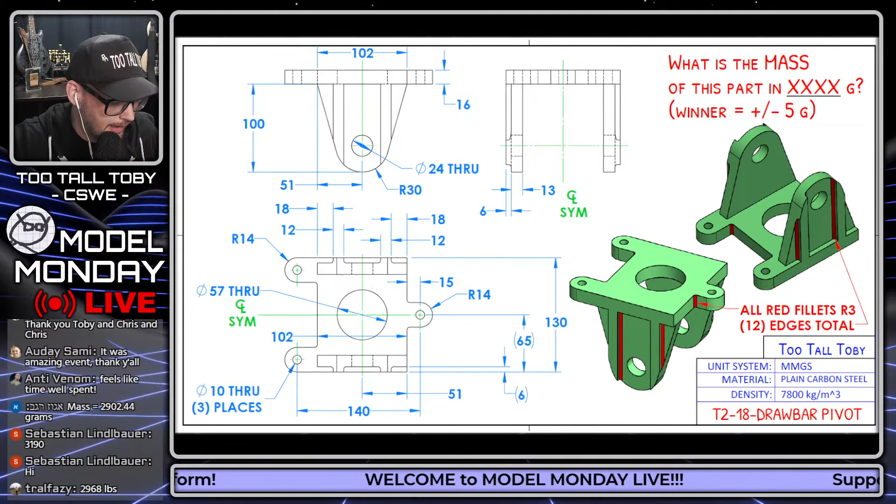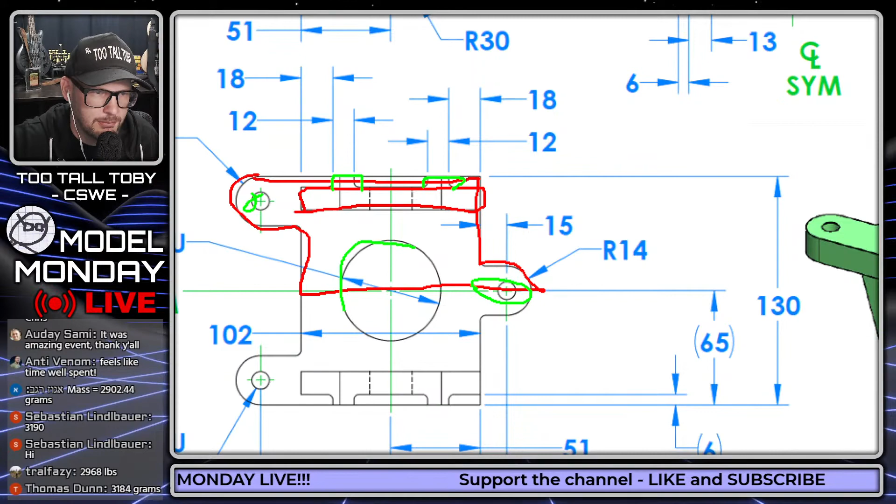All right, let's take a look at our answer for number 2. So this thing was called drawbar pivot. I'm not sure how exactly I would do this one, but I would probably start out by creating this shape, probably just half of it, like this. Then I would create this vertical plate here, and then these 2 ribs here. Then I would add all the fillets and these holes, and then I would do mirror all. I'd probably add this last hole last because I'd probably forget about it. That's usually what I do when I have a center hole like that - I forget about it and then add it at the end, and I'm like, oh crap, I forgot.

So let's see what we got as far as the participation from the chat. Here we go, roll back up here.

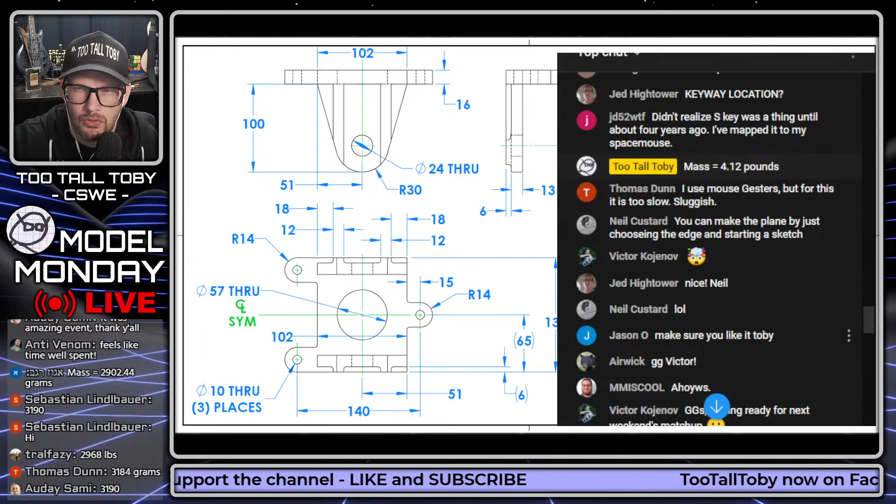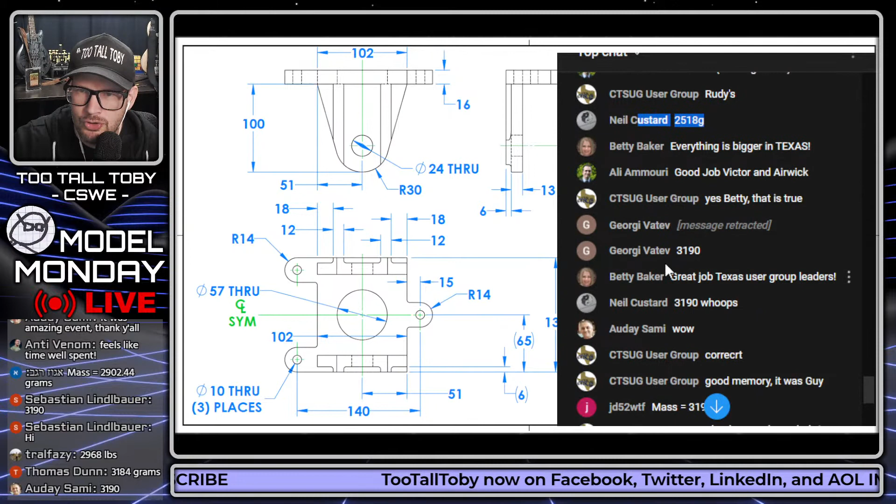Looks like Victor K came in with 3190. Okay, nicely done Victor, we'll see if that's correct in just a moment. Airwick coming in 3190. Ali coming in 3190.16, we'll round that up to 3190. Ali revised to 3190, nice. Neil Custard coming in 2518, a little bit of a variation on that one. Georgie coming in 3190. Neil Custard revising to 3190. Nice, nice. We got JD52WTF coming in 3190.

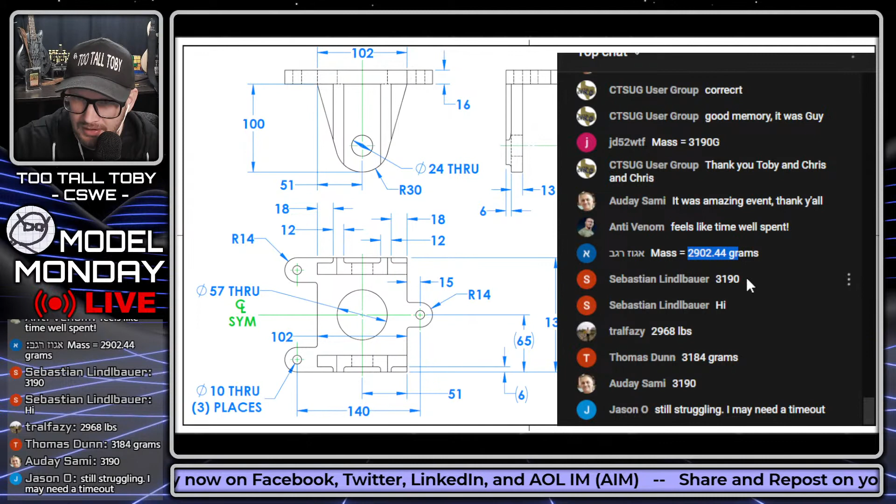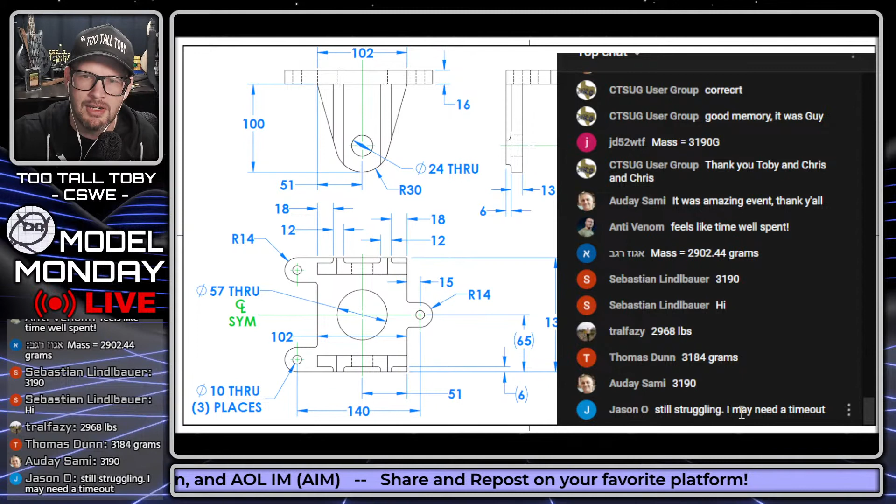Nice, we got our friend from earlier - wait, what was his name again? Egaz. We got our friend Egaz coming in here with 2902. Nicely done. We got Sebastian coming in 3190. We got tralfazy coming in with 2968. We got Thomas Dunn coming in 3184. We got Auday coming in with 3190. And Jason O asking for a timeout. Sure, yeah, we can pause the live stream for a few minutes and give you a chance to finish that one up, no problem. All right, let's see what the answer is to this.

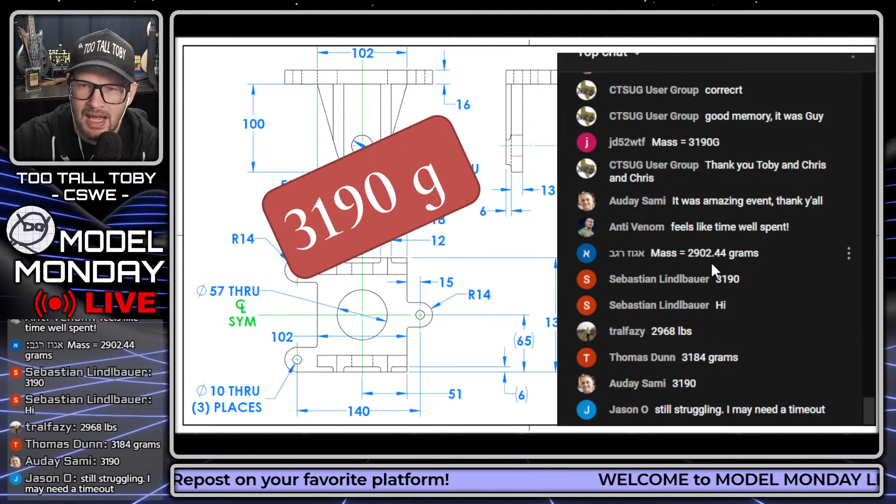So the correct answer is 3190 grams. So congratulations to Victor K, who's made it into the round of 16. Just smashing it today, getting the first answer on both of these challenges today. GG to Victor - guys, be sure to give Victor a GG in the chat. And GG to everybody, to our winners, and really to everybody who was here today who participated.